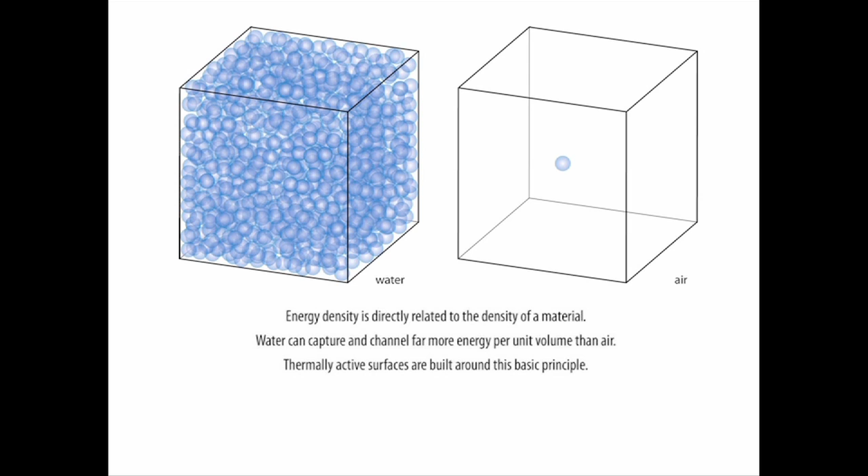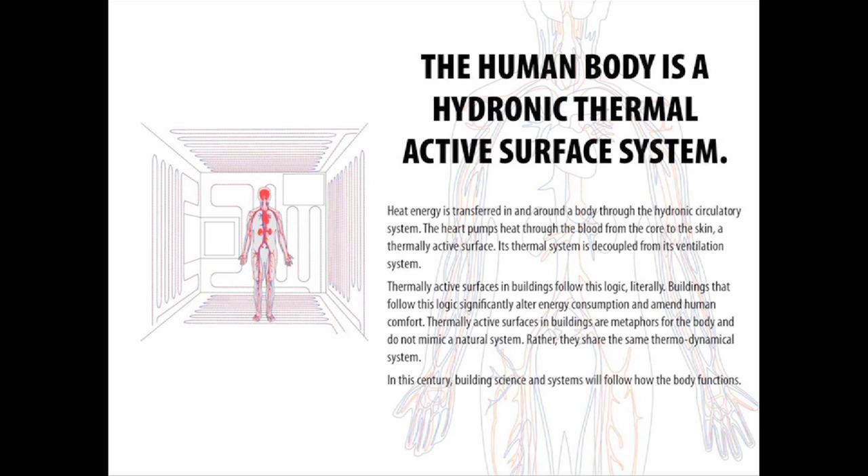This is why the body, too, is a thermally active surface. It channels heat energy from its core to your skin and vice versa as its primary thermal system. So you can imagine what would happen if we heated and cooled our bodies with air. Our bodies, the veins, the heart, the lungs, the caloric intake, all would be about 800 times bigger than they are, which is irrational. It would be absurd. So it is hard to imagine why we choose to design buildings around that idea.

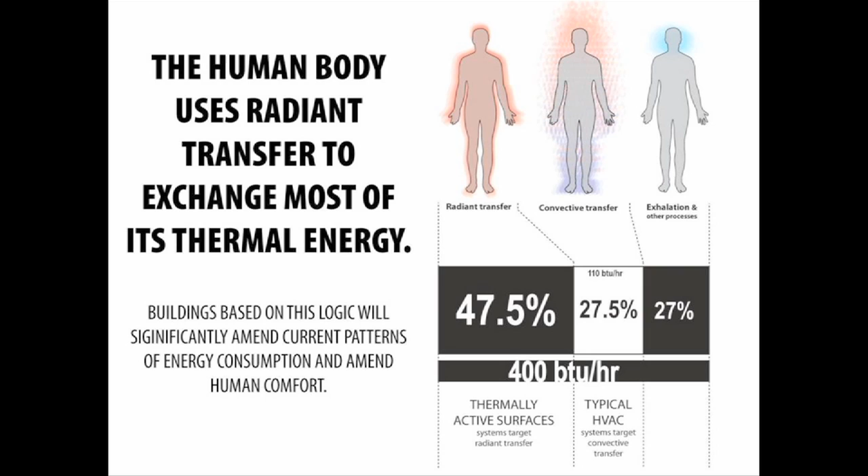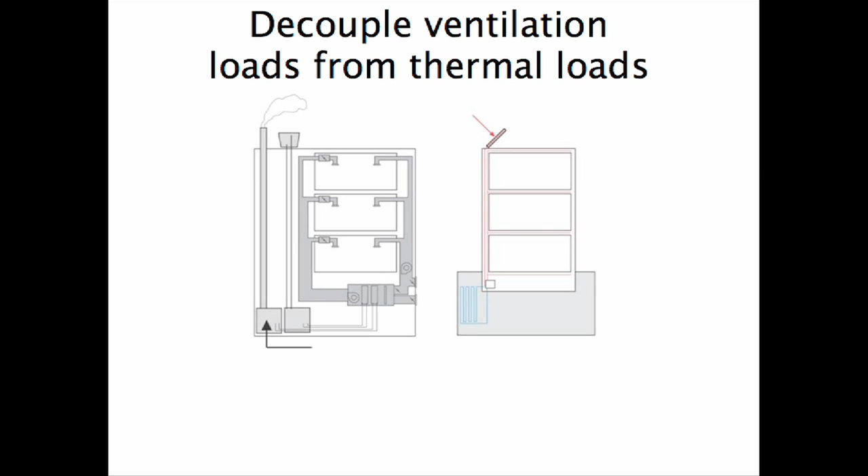Because our bodies are thermally active surfaces, it is my view that buildings should finally occupy that same thermodynamic space as our physiology, as a basis of a more efficacious building design strategy for this century. In such an approach, just as in the human body, the thermal conditioning of a building is decoupled from its ventilation system by using the activated mass of the building itself as the thermal system, thereby minimizing, if not eliminating, familiar air-based systems and all the frankly boring, expensive, and abject junk that goes with them.

In doing so, thermally active surfaces trigger a cascading set of advantages for architecture, including lower energy consumption, more durable buildings, more healthy buildings, more integrated buildings and design teams, and perhaps most importantly for me, new formal potential through thermodynamic configuration. Importantly, I see this as an architectural advancement of building technologies. This is a direct consequence of an otherwise neglected conflation of matter and energy in architecture. Traditionally, these systems have been regarded as disparate, with their own courses, consultants, histories, theories, etc. This division is fundamentally false. The reality is that matter is but captured energy.

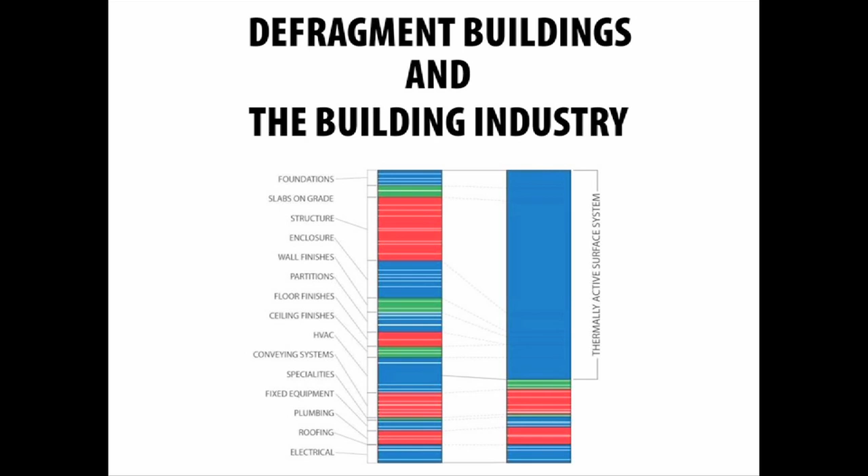So in addition to adjusting some of architecture's basic assumptions about energy and matter, there are some more overtly instrumental implications of thermally active surfaces that point to more agency for architecture. One example, for instance, is that thermally active surfaces approaches defragment our inordinately complicated buildings and design practices into much more simple and pithy efforts that yield more complex behaviors, which is what I'm more interested in.

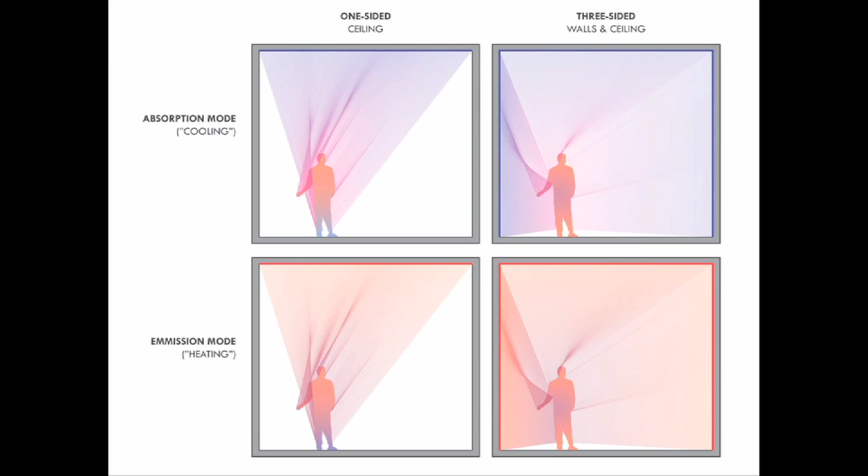And a case of that includes this phenomenon of thermal asymmetry and thermal symmetry. Essentially, one ideal diagram for a thermally active surface building is that all the surfaces around your body are active, and you end up insanely much more comfortable, but also using radically less energy in that process. So if any of these ideas about thermally active surfaces make sense to you, a perfectly reasonable question becomes, well, then why do we heat and cool buildings with air?

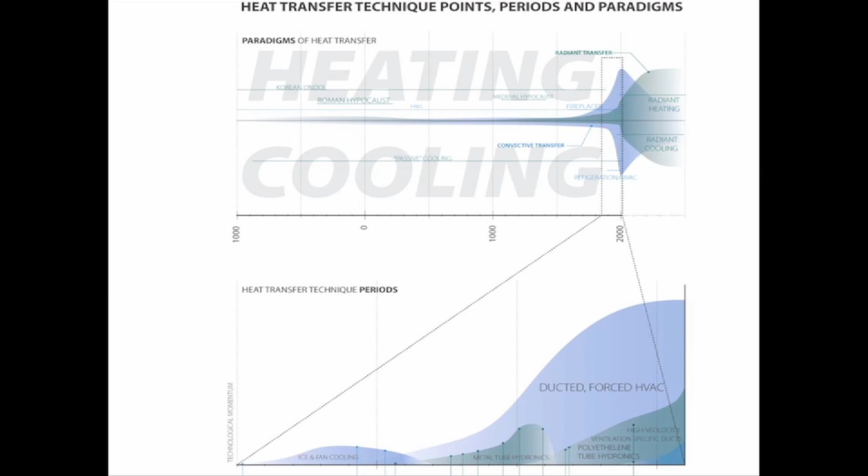And the answer to that question is historical. So this book has chapters that explicate the parallel histories of radiant and convective transfer techniques throughout history. In terms of air, I look most closely at the compelling insights and even more compelling oversights that guided Willis Haviland Carrier, here dressed as a wet bulb thermometer, and his derivation of the psychrometric chart and his subsequent industrial

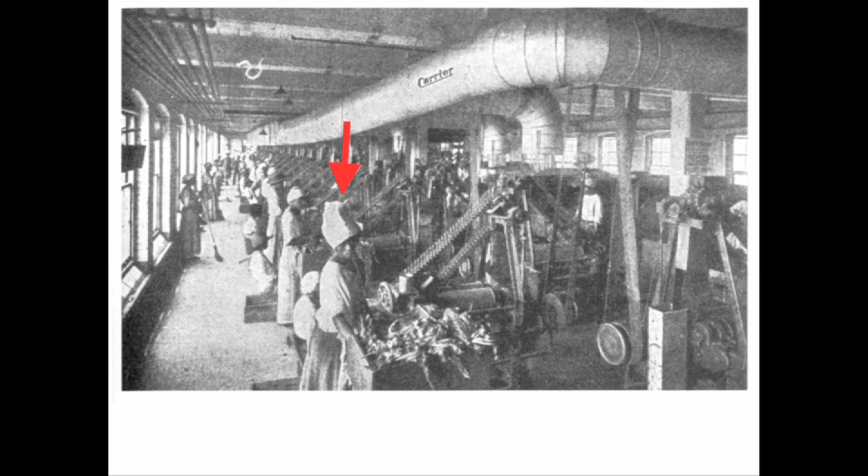enterprises. In short, while perfectly aware of its physiological significance, Carrier simply ignored the role of radiant transfer, primarily because his initial thoughts about air conditioning had nothing to do with human comfort, but rather solving problems with hygroscopic machines, such as printing presses in Brooklyn or cigarette factories in North Carolina, not the bodies that operated these machines. And the logics of these air-based systems were only marginally adjusted when they migrated to buildings.

In respect of radiant transfer, I focus on the 3,000 plus year history of this converged material and energy system that began with the Korean ondol to the successes of 20th century thermoactive surface architecture such as Duiker's open air school in Amsterdam, as well as that century's metallurgical failures that have hampered the momentum of this approach to

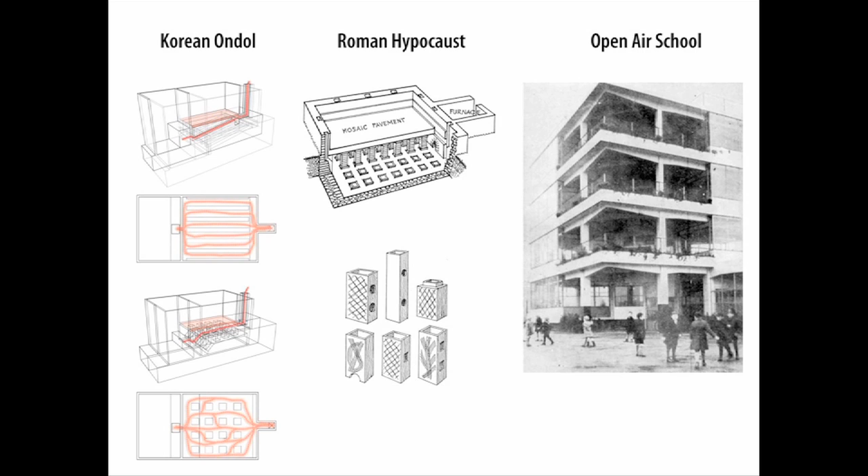constructing thermoactive surfaces. And together within the book, these histories arrive in this matrix, which illustrates the number of systems of a number of canonical building envelopes from the 20th century, and divides them up into air and water-based energy systems. And in all cases, the air systems used more layers, more systems, more labor, more embodied energy, et cetera,

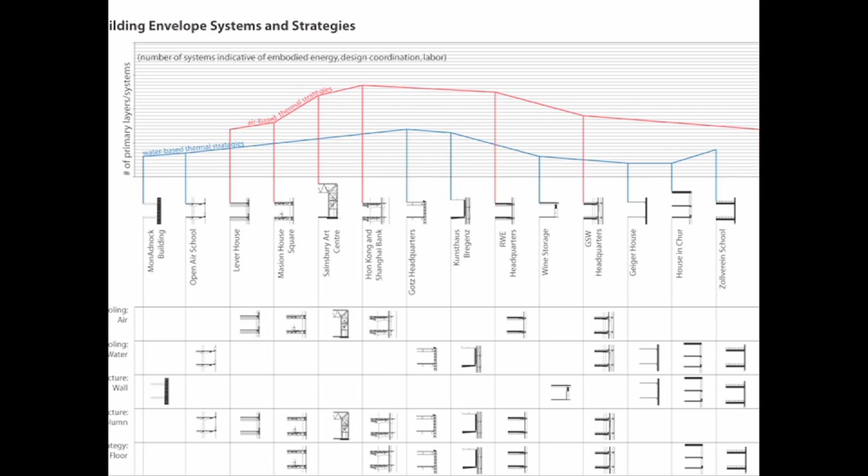et cetera. So this book ultimately explicates alternate physiological, thermodynamic, historical, economic, and most importantly, alternate design trajectories of the discipline in this century that can increase our agency and open up new possibilities. One such possibility is much lower technology but higher performance building.

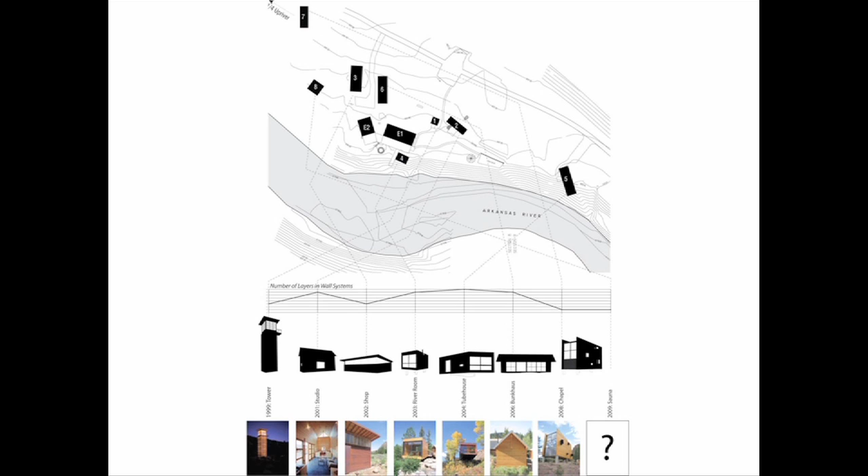The following building is a small design it, build it project. And as part of my work, I typically construct one project each summer. And this project is called the Stack House, which is the 7th project on the same site, which is an old silver mining claim called the Georgia Bar, located in the upper Arkansas River Valley, located just in central Colorado.

And it was recently the site of a Valentino photo shoot. Amazing what beautiful people do for otherwise unhandsome buildings.

The Stack House is the most remote of all of these projects. And the hilltop site can ultimately be accessed only by foot, which drove a number of parameters for this kind of project, including the minimal amount of concrete one would want to bring to such a site. But what's interesting about the Stack House is that it's a solid wood building. It's built out of 6x8 spruce timbers, an example of which you can see in the gallery next door.

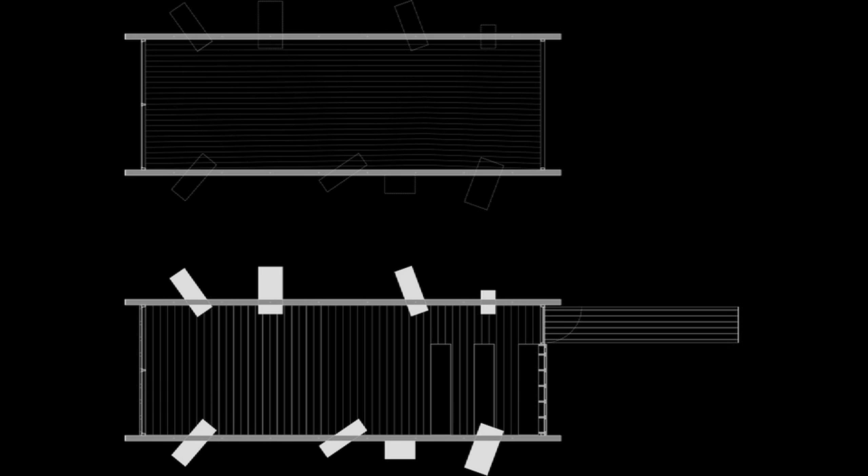But these members are used for the structure, the enclosure, the insulation, the finished materials, everything that goes into a particular building envelope. It's a simple volume of space. It's a set of steel boxes that frame a whole set of views to the adjacent landscape. The big window looks down the valley to the south.

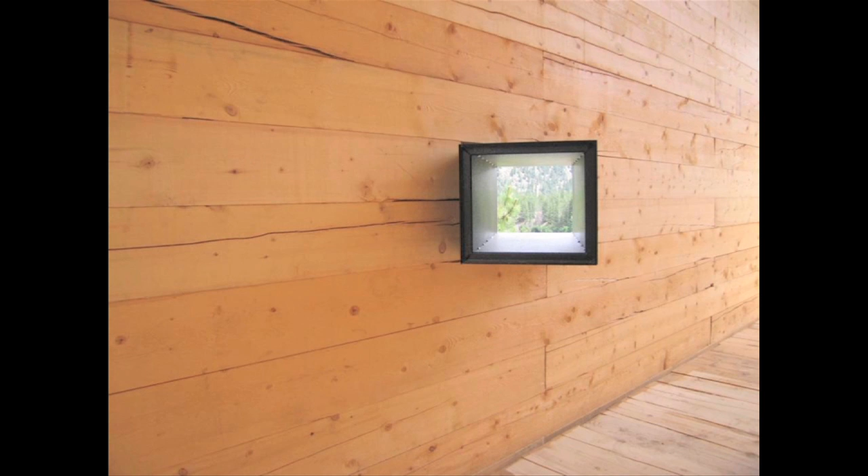Actually, not part of it. Other windows that look back at the other buildings. One that's down quite low for his grandchildren to look at. And this guy's a former Olympic kayaker, so the river is very important to him.

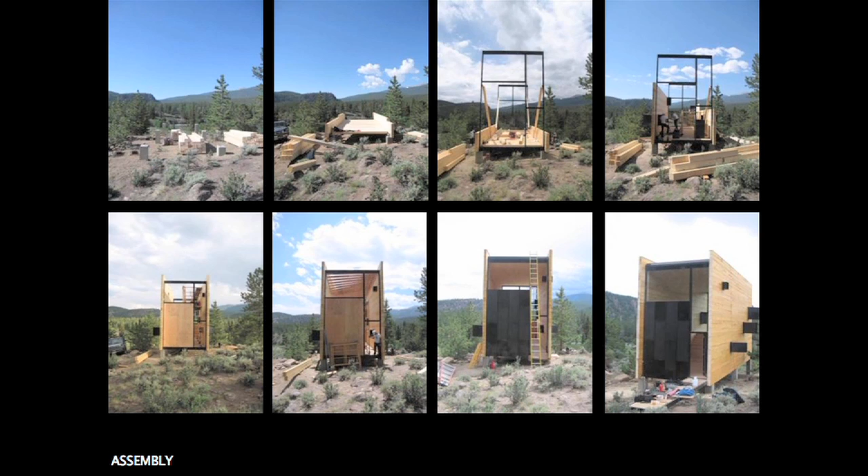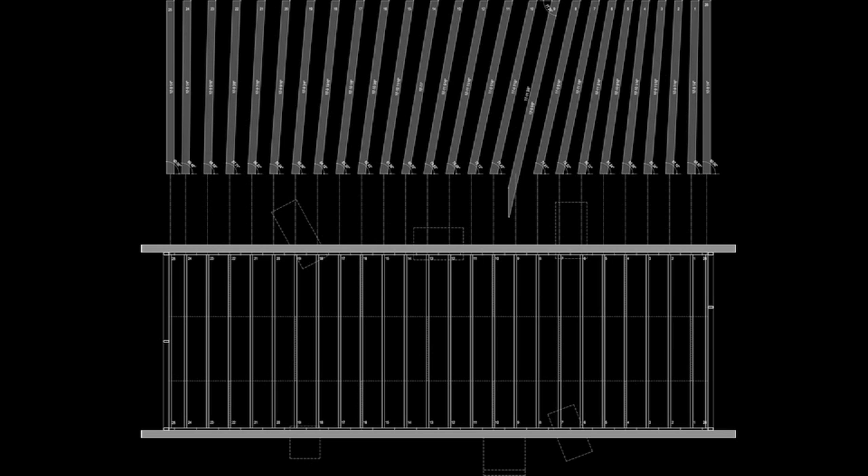But what bears explication in the discussion tonight is the assembly, different aspects of the assembly. The roof is a ruled surface, so it has an asymmetrical belly on one side, flat on the other side. That results in each joist being slightly different. It adds all of 17 minutes to the construction schedule, but adds considerable performance to the space, both for removing snow and rain, but also other factors on the interior that I'll talk about.

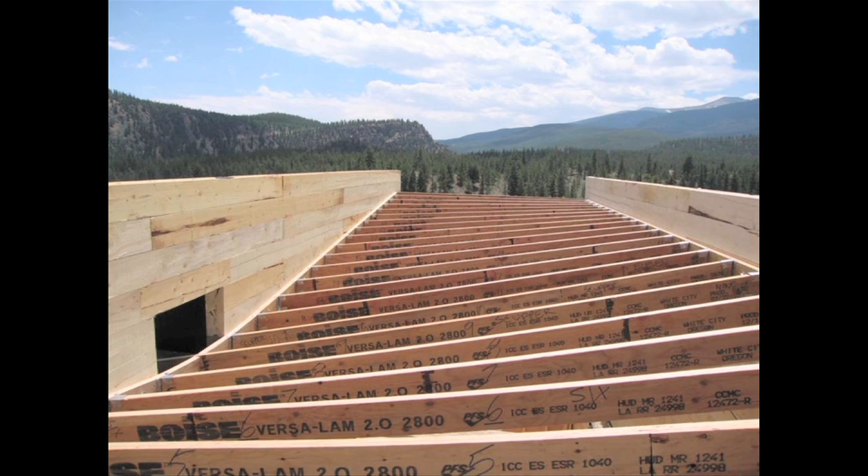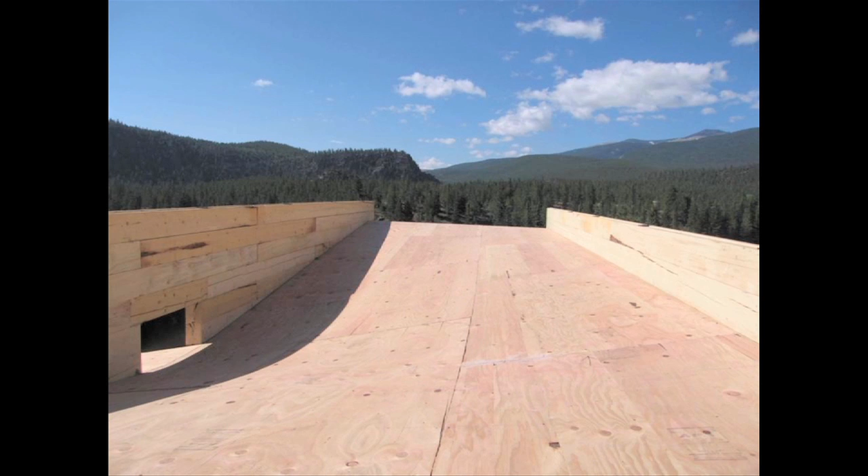Which is, I see this as a latency within any kind of roof surface that they can be doing much more work. So that roof up top is part roof, part skate park there, just during construction. But on the interior, it operates to bounce light around and also bounce sound around the interior. The inaugural performance in the space was a production of Mamma Mia by the Leonards' grandkids. So these sorts of things matter there.

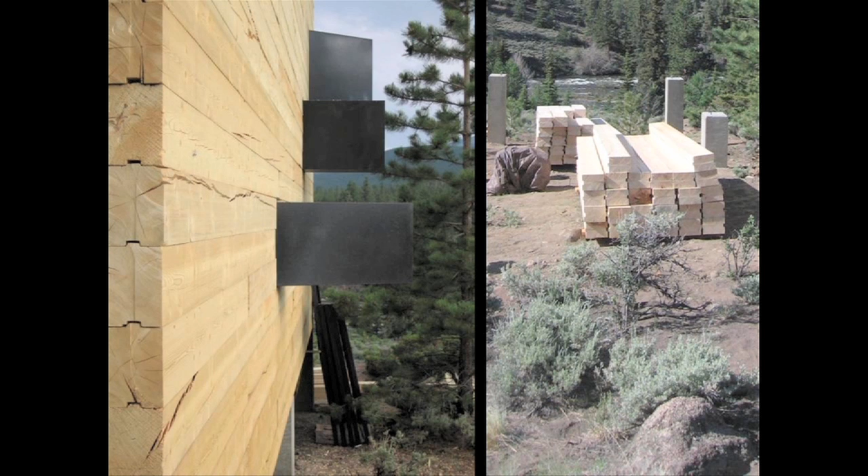But it's a subtle surface in the space, a lot of people miss it. But it's the walls that I think deserve the most attention. That's what I'll spend some time on this evening.

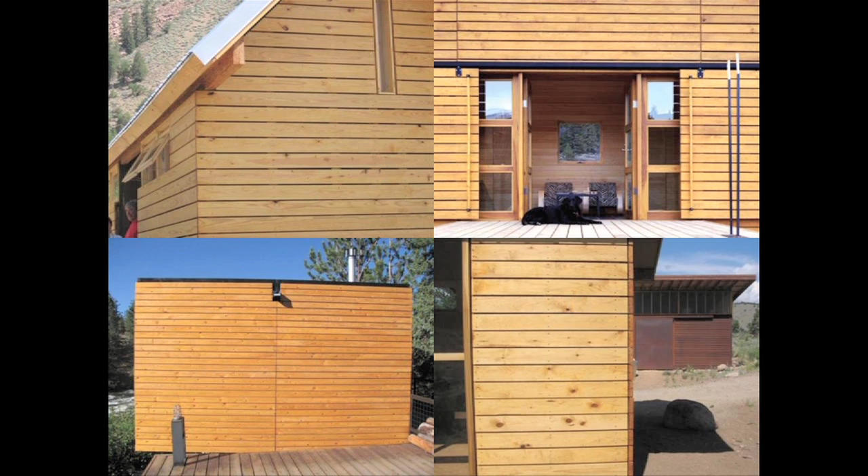So again, all the systems are embedded into this one layer of 6x8 spruce. This is quite distinct from how one would normally build a wall and how normal building scientists suggest we should build a contemporary wall. And this is how a number of other projects that I built at the Georgia Bar were constructed.

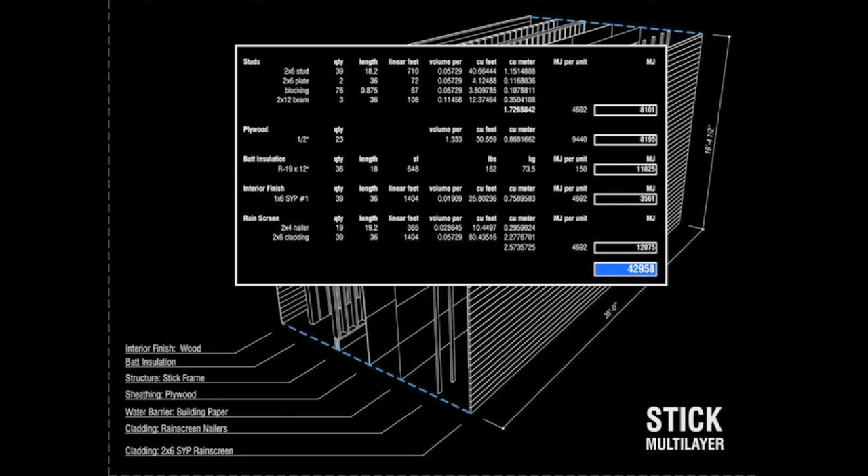So one would normally start with stud framing and build up a multi-layered assembly with insulation, plywood, and a lot of other layers that have fairly intense industrial processes attached to them. And that results in a quite high, in this case, embodied energy value for that wall. It also results in what I start to visualize as a fairly vulgar material geography for that approach to construction as well.

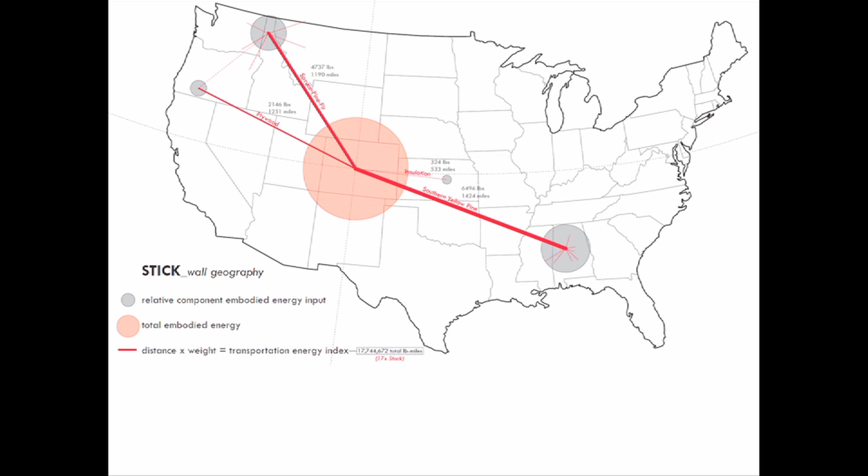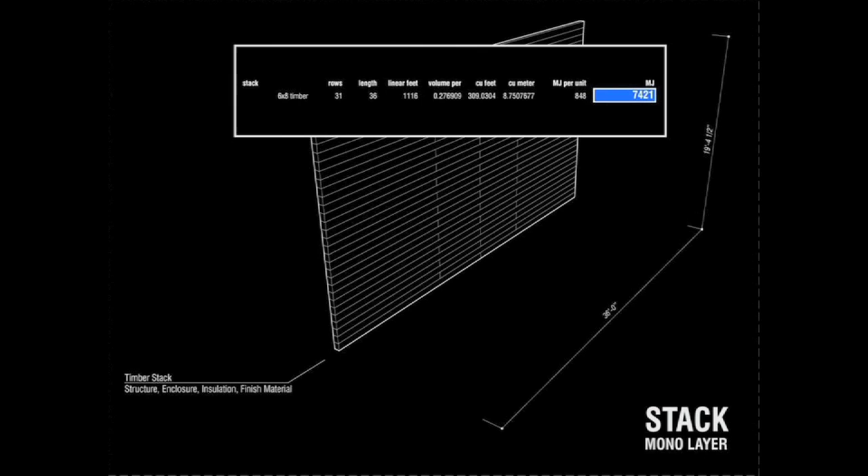And this stands in distinction to the stack house wall, which is a mono-layered system. All the spruce for this project was grown in the same valley, in the Arkansas Valley. It was milled and air dried in the same valley, which results in a radically lower embodied energy value and a much different material geography for that wall.

And all this leads to an idea that we're not really designing the externalities of architecture, and I think that's one reason that we're seeing a receding horizon of practice and agency today. So I think these eco-logistics need to be much more than just little matters of fact, but taken much more seriously as a matter of design concern.

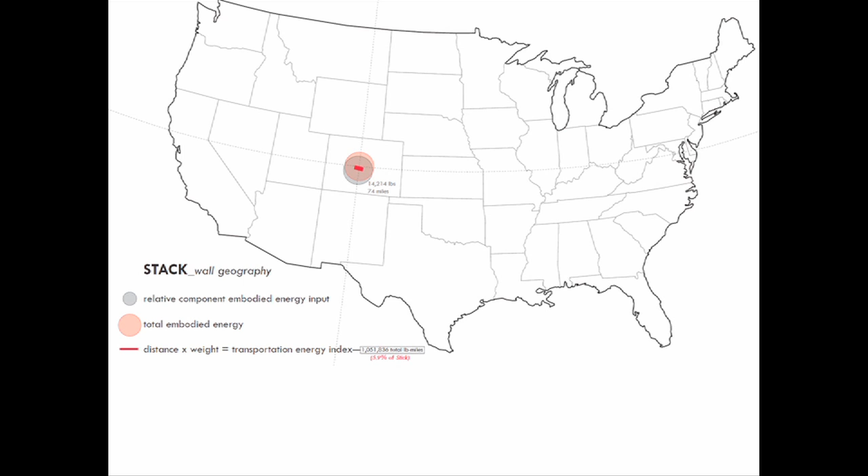And so in this case, one outcome of that kind of thinking is that, in a more crude sense, more money was spent on the building itself rather than paying some guy to drive wood from Georgia or somebody to drive insulation from Kansas. There's nothing architectural about that, but there is something architectural about stacking up the wood in this particular way.

Another seeming matter of fact that is really a matter of design concern deals with otherwise typically unconsidered properties of wood. Stack house is a thermally active surface building, even though it doesn't have hydronic tubes or any other power running into the building. There's actually no energy systems going into this building other than sun certain times of the day.

So it's interesting from my point of view to explicate the building's performance, which is verified when the owner calls me in the middle of February and it's 10 below outside and he's inside in a pair of shorts and a t-shirt doing his reading and yoga and painting in that space.

And the performance of this building, which is totally net zero and is actually a carbon sink that I'll get to in a minute, has nothing to do with ideas about R values or what typical building science suggests about how we think about walls today. Rather, especially important in a solid wood building such as this, is the role of thermal diffusivity, which is a property I've never heard discussed in architecture.

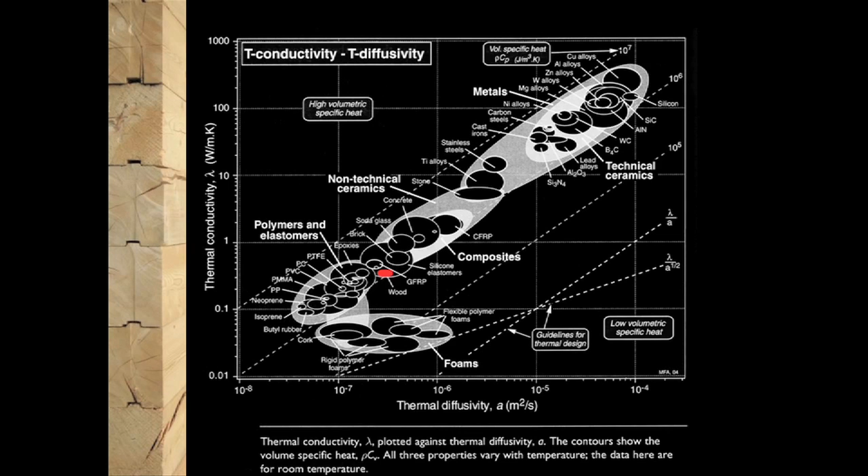So there are these whole realms of real performance of spaces and architecture and materials and energy systems that we're intentionally leaving out, in the same way that Carrier left out radiant transfer when he was thinking about air conditioning. And so we're doing this all over again and making the same sorts of mistakes.

But this Ashby chart, where he's showing where these two axes cross, is an ideal set of materials for a Trombe wall system. Of course, the stack house is not a Trombe wall. It's not treating the wall as a thermal battery. But it does show some things, like stainless steel would actually be a pretty good Trombe wall, which is a beautiful idea in itself.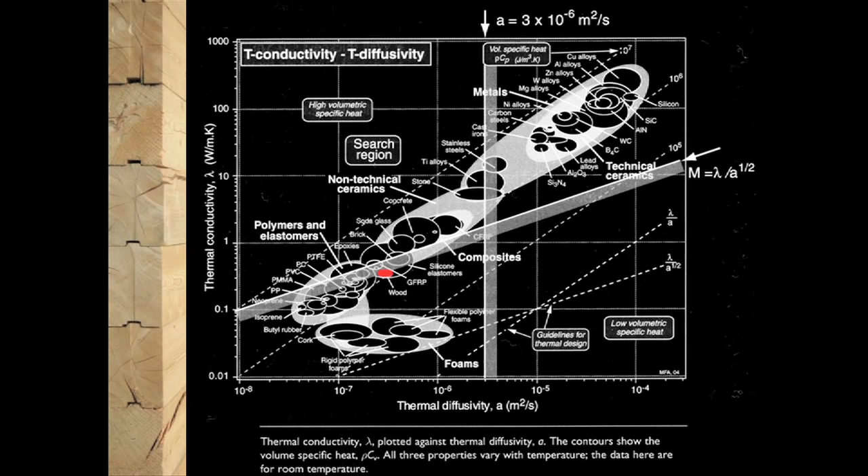But in this solid wood construction, what you want is to slide the diffusivity down a bit and have conductivity around so that you can sit in the winter in shorts. And it turns out that wood is quite good in this range: it's dense enough to absorb heat, but not dense enough to be overly conductive. And spruce is particularly less dense and well suited for this job.

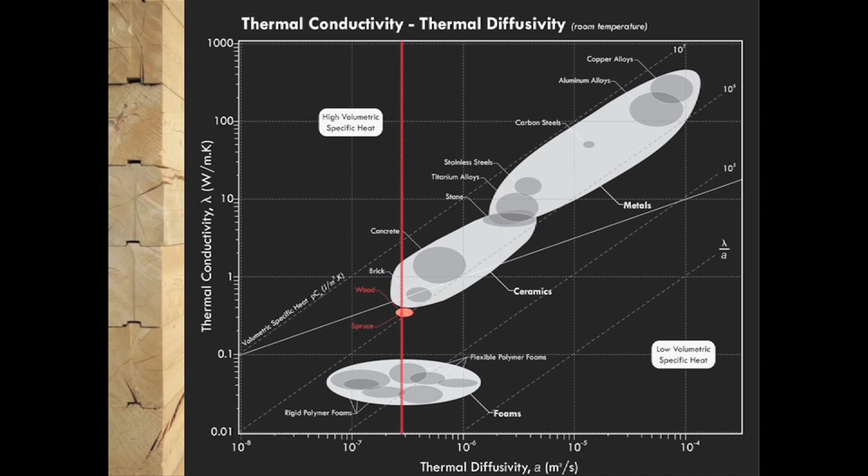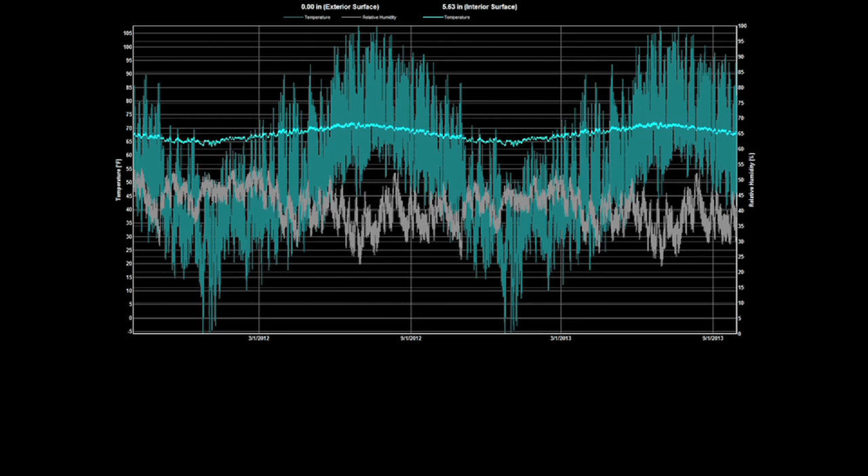And so, images like this begin to explicate not only the building's performance, but begin to demonstrate how inadequate a lot of aspects of contemporary building science actually are. And again, once you start to explicate these notions, they sort of open up other possibilities.

Another kind of potential matter of fact that I think is a real matter of design concern increasingly, especially with Jason's and Natalie's melting ice floe in mind. Another aspect of this building is that it's the only building that I know that has sequestered twice as much carbon as it took to produce the building itself.

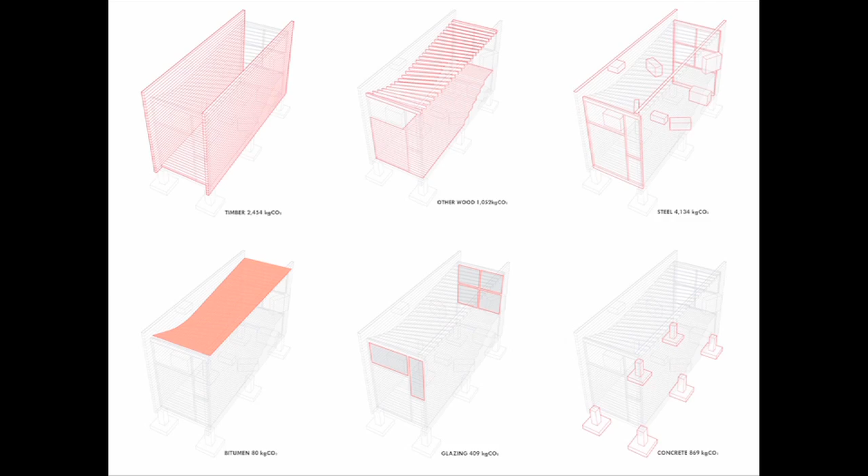So when you start to add up all of the carbon that it took to produce different material systems in this building, and you compare that with the amount of carbon that's sequestered by the wood itself, you subtract out those materials, you end up with this surplus which is equal to the material itself. Or you can build a whole other stack house, I guess. That's other possibilities, other geographies associated with it that are increasingly less trivial.

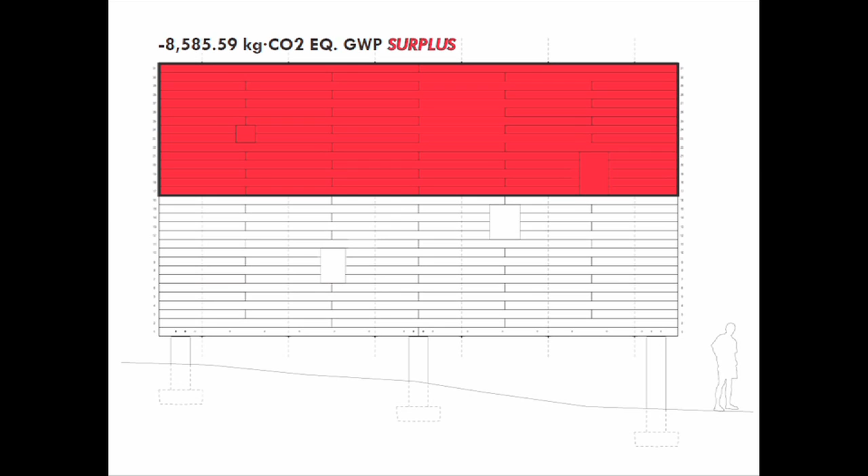And one thing that I like about this is that this is not a strategy about efficiency or anything like that. Fundamentally, it's a strategy about surplus. And that's what I've told architecture: to have surplus beyond building. And so it's an approach to energy and material systems, not efficiency.

For the brick building, I tend to begin with the massing strategy with the brick itself, which is, if you're Dutch, it's kind of a tongue-in-cheek joke. But if you're a guy like Mies, it's a very serious architectural proposition and an ordering system.

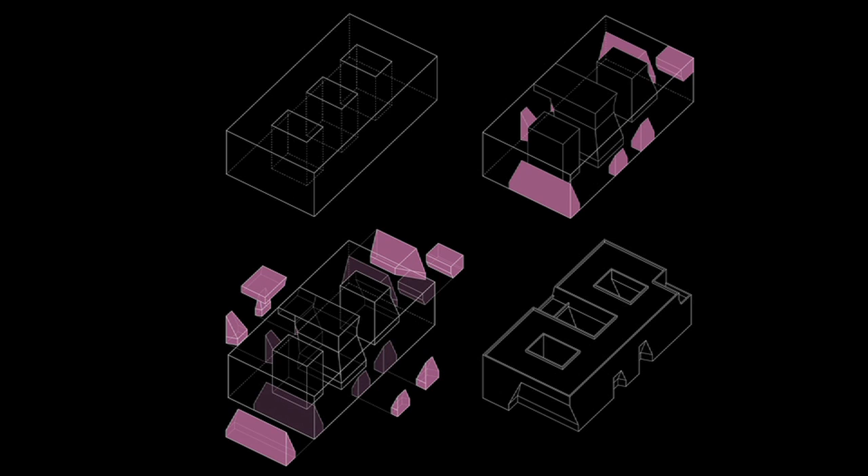But in this case, the brick ends up being modified by a series of portholes that create entries, loading docks, and self-shading surfaces, such as this south-facing surface, which creates the entry for the loading dock, but also during the overheated period is entirely self-shading, which is shown by the images here. Anyway, so this conflation of material and energy is what produces the constructional strategy. It's what produces the configuration of this building.

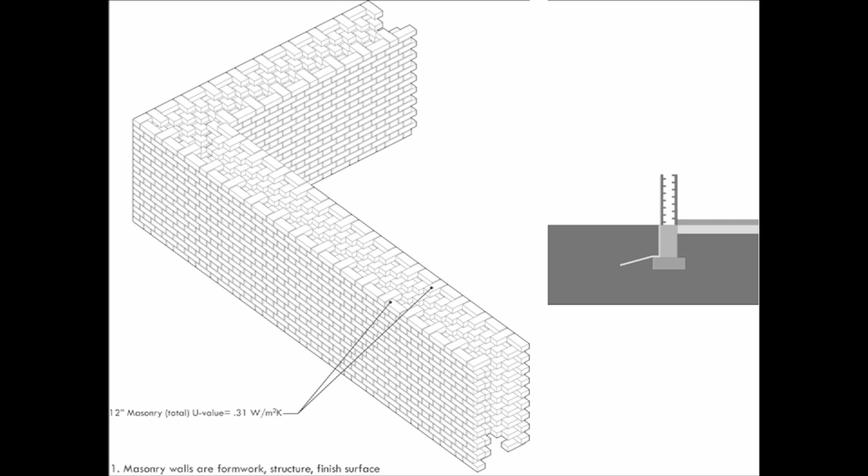In this case, the masonry wall is essentially highly durable formwork for a very lightweight type of concrete. It has a very low U value. It's again this kind of monolayer wall. The expectation of this performance under certain conditions creates extremely durable architecture that I guess suggests a certain kind of optimism about the future. It might be worth doing this. But issues of durability, resilience, and adaptability are fundamental to the thinking in this proposal.

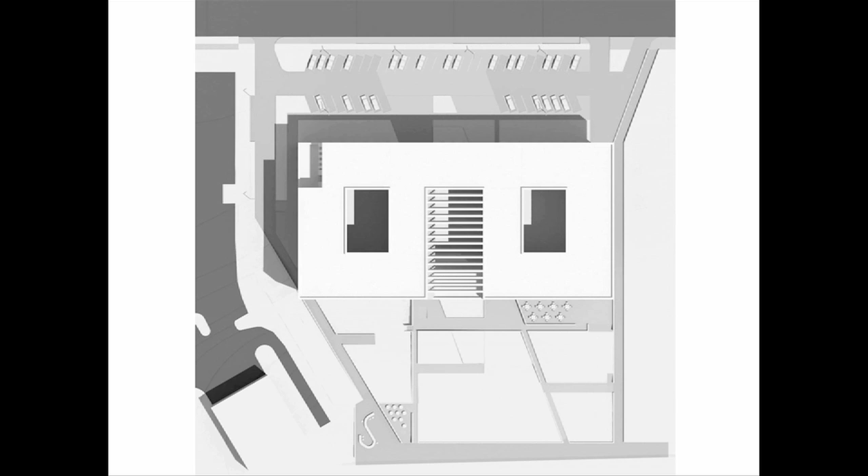But there's other aspects of the configuration of this building. It's driven by thoughts about the generic in architecture, where in this case the ground floor plan here is much more figured because there's more explicit programs. But as you move up the building, the corbelled wall sections create more idiosyncratic spaces that are well suited for seminar rooms or lobbies and this sort of thing. But by the time you get to the upper floors, it's much more true generic office space.

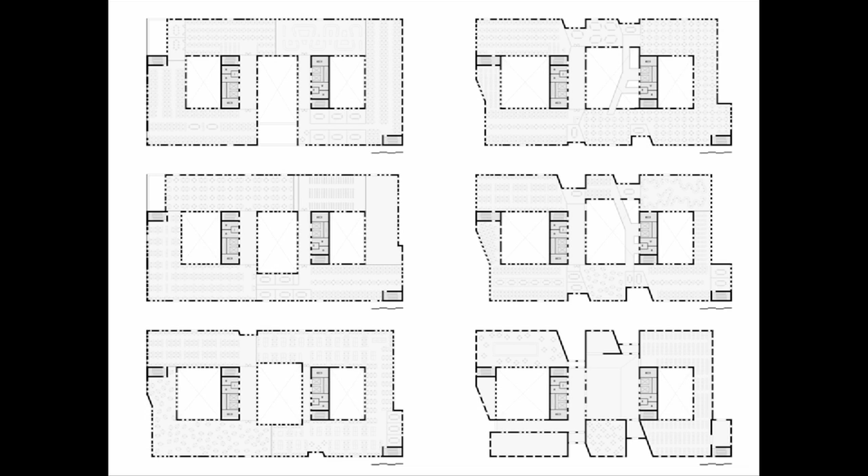But of course, the floors of brick are what create light shafts for air and light to get into the spaces. And of course, the horizontal structural system is a thermally active surface structure, which relates to these themes of durability and resilience.

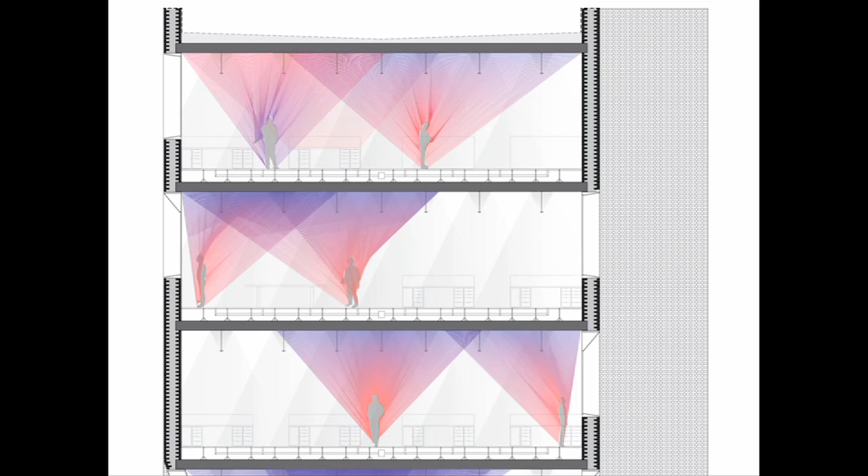So, especially as I've been looking at the work going up in the gallery, I see certain themes that are quite continuous. I think we all share certain obsessions with intricacy and accumulation. In my case, I think the intricacy is best understood in terms of the physics and the physiology of the space, and the accumulation is usually in terms of some kind of dumb mass. Which is not to say any of these things are more beautiful than others, but I'm appreciating looking at those qualities in particular in the gallery.

So again, whether in research and publications or in design and fabrication, the role of explication in my practice serves to question assumptions, to identify specific strategies and making tactics, and to advance the specificity and agency of architecture in the century.